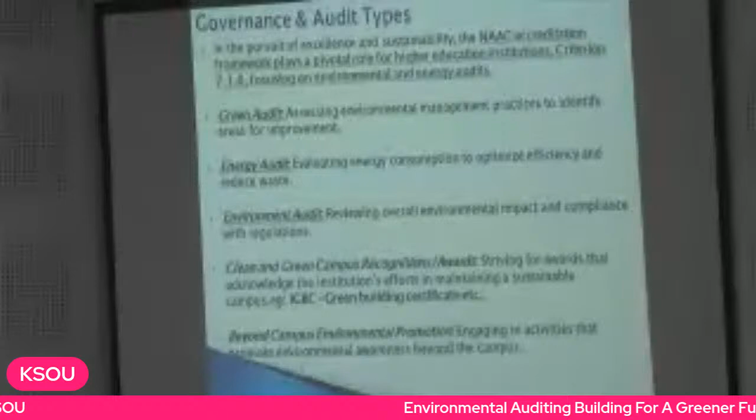There are various types of audits. One is green audit, which we discussed now. Another one is energy audit, just before this there was an energy audit. Energy is also one of the major areas because energy plays a vital role, because it cannot be seen, but it is having a vital role, and environmental overall performance.

And what will it give? It will give a reputation and recognition that we have discussed already. In the bottom line, I have mentioned green building certificate. Green building certificate is nothing but, if we take this auditorium itself, if you allow more ventilation to come in, more natural light to come in, and less...

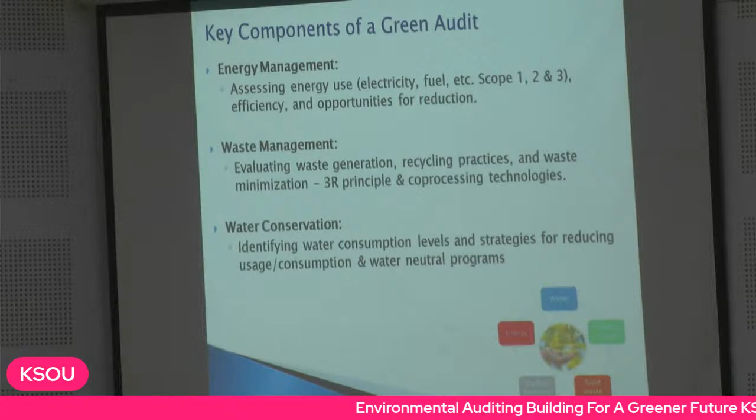Importing those technologies will help us to reduce the burden, for our commercial usage or for our industrial usage, to run a factory, or to run an institution, or to run a warehouse.

So how do we handle water conservation - the major thrust we have to give on the natural resources and also on reduction and conservation. Suppose if you are using more water, how can we save it, how it can be recycled and utilized for our gardening purpose, or land use purpose, or the landscaping purpose.

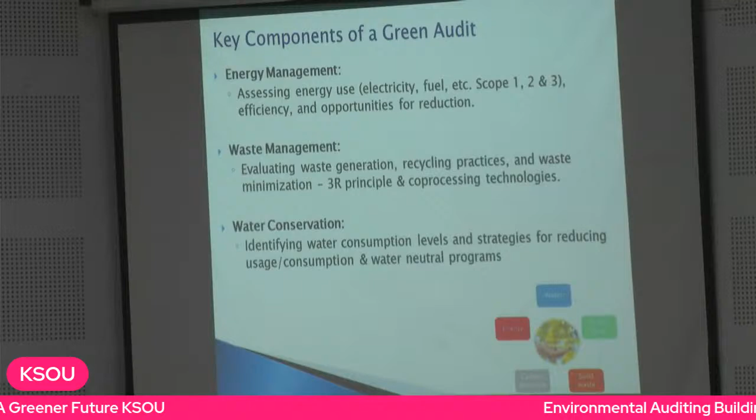These are also key components in terms of resource efficiency, meaning whatever we discussed - natural resources, how better we optimize our resources and how effective our controls are, how best we are utilizing. There are many terminologies coined now - water neutral, water negative, net zero, zero liquid discharge. Those all come under resource efficiency.

Carbon footprint assessment, basically greenhouse gas emissions - it is more of a tabulation, meaning like what I mentioned earlier, scope 1, scope 2, scope 3. For every natural resource or every energy we use, there is an amount of energy, there is an amount of impact to the environment in terms of CO2 generation.

So we have to tabulate it, and many technologies came into play, because suppose if you are getting power from wheeled sources, meaning from solar or wind, your conversion factor, or the leakages, or the generation - the amount of carbon dioxide getting burnt is less compared to conventional energies.

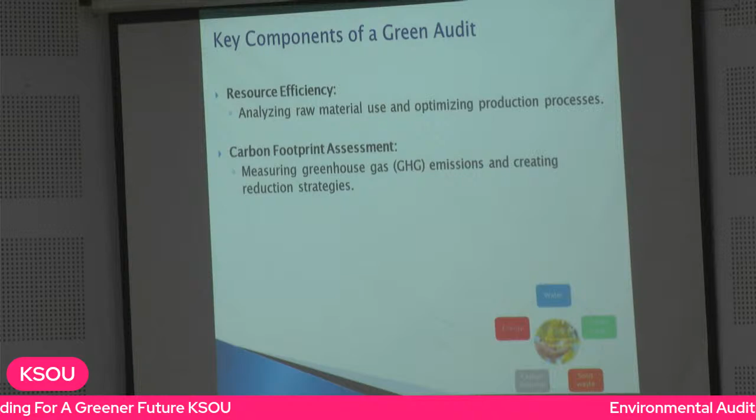Suppose we wanted to do an environment audit or assessment for this auditorium, this is the boundary. Within this boundary, we assess ourselves for data collection: how much electricity we are consuming per day, number of students, or number of hours, like that. And there should be inspection records and monitoring.

From this, we should analyze and evaluate ourselves. Is there any chance for improvement? Instead of using these lights the full day, can we allow natural ventilation or natural lighting, where we can reduce electricity consumption and reduce our requirement? And finally, report and submissions. Reporting means the current state, and recommendation is the future state, meaning you have an opportunity for improvement. And there will be follow-up. This methodology is followed in all ISO systems: plan, do, check, act.

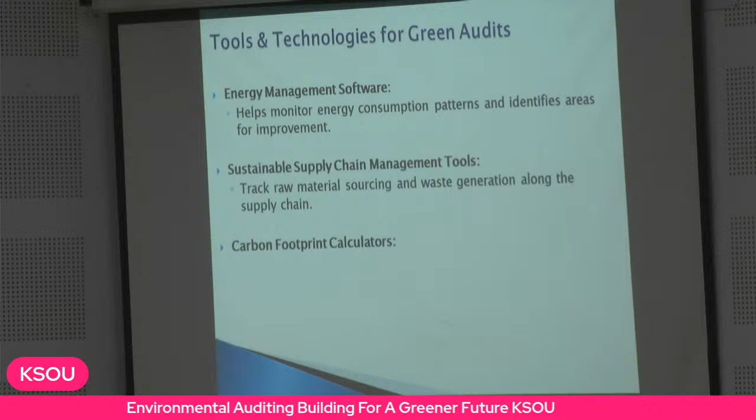Carbon footprint overall, that we have discussed already. This is one of the major areas, like in every audit or every assessment, why we will not easily go for it, because there are some challenges also.

One is cost. First one is cost, because you have to hire an auditor, you have to maintain your resources, you have to invest some part as cost for deploying these activities, manning the people, or involving external agencies, or taking approval for certifications. Sometimes you buy an instrument which is not as per your rated capacity, but you want to upgrade it to meet the standard. If not, you will not get certified. So those times there will be cost implications.

And data availability, if it is manual, there can be data mismanagement also, and that will lead to your benefits coming down. It may not impact much, but if it is a major regulatory one, your certification will get on hold, or you will be given negative remarks in the market, or sometimes your audit scores or assessment scores will come down.

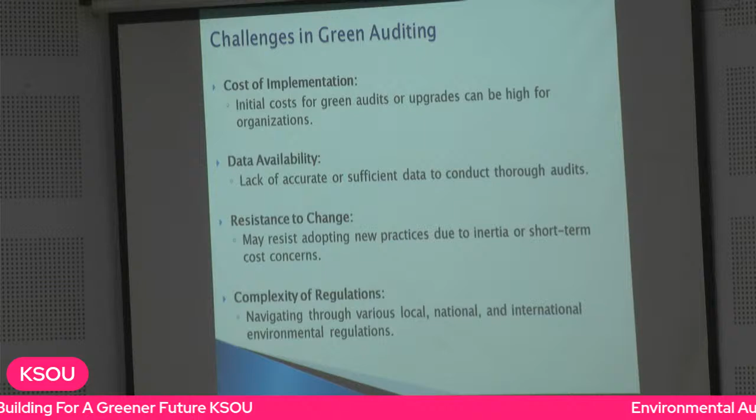And also sometimes there is complexity of regulations - understanding ISO 14001, the same clauses for my activities, I'll understand in my own way. But for the same clauses, for the same set of activities, an auditor understands differently, because they would have seen many best practices, many improvement areas. Whereas for me, my scope of understanding or expertise will be very low. Like this, there will be complications with respect to regulations also.

These are some of the reference standards, common for green audit or environmental audit. First is green building - the CII or Bureau of Energy have this code of rating system. And energy, as Bureau of Energy already mentioned, and ISO certification - as an industry we have all these certifications, be it quality management system for our product, ISO 14000 for environmental best practices, and occupational health and safety system for overall employee welfare and wellbeing, also considering industrial hygiene practices.

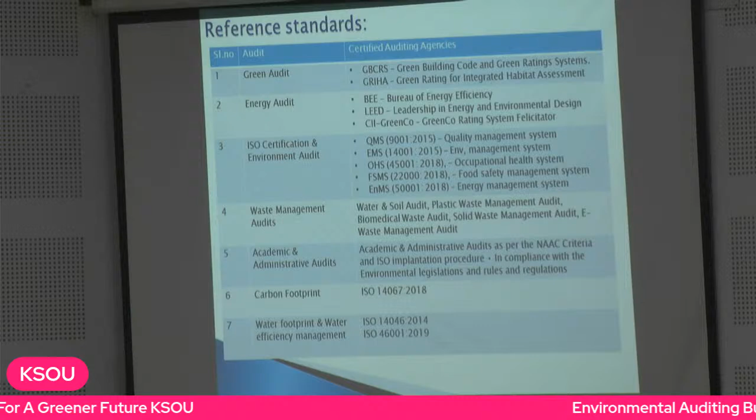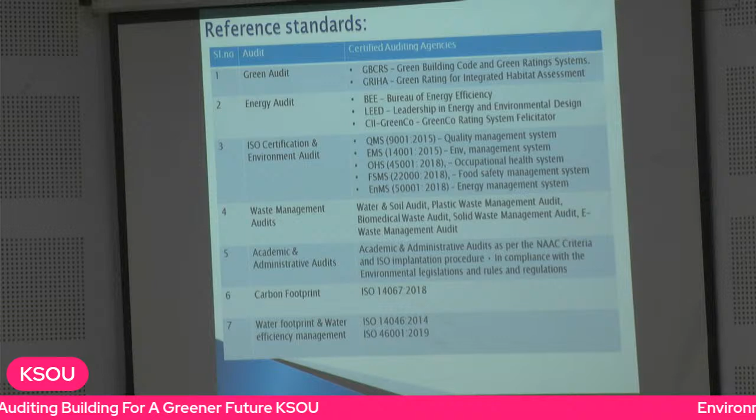And food safety management - we run a canteen round the clock for serving our employees, so that is food safety management. And EnMS, just before this session there was an EnMS, because whatever initiative we have made is certified under EnMS, Energy Management System. And waste - these are all different audits. And carbon footprint, there is a guideline 14067, which was revised in 2018. And water footprint and water efficiency under 14046 2014, and ISO 46001 under 2019.

Some case studies, it's a general overview - you can take a note.

Toyota - if Toyota decides all their units to be energy efficient, or all their manufacturing units' energy to be reduced by 10%, that is an objective. They will give a direction to all units. Then obviously they look for the opportunity - how to reduce, where, and they have an opportunity to reduce the energy. In terms, it is a benefit for them to manage the overall environmental impact in a positive note.

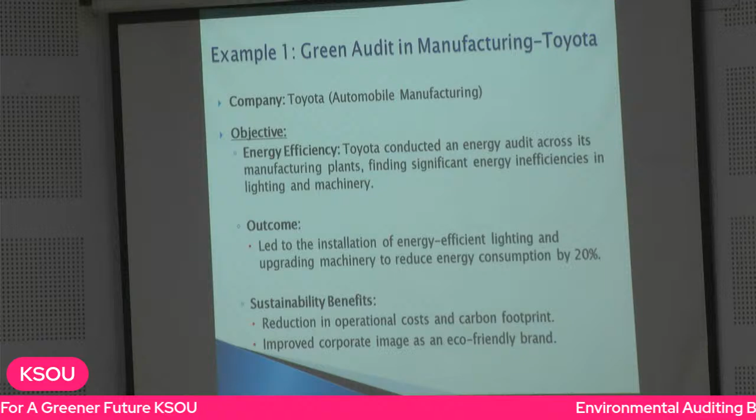This is Nestle chocolate manufacturing. If they decide to conserve their water consumption or water management system, they'll look for new technologies, advanced technology from the generation point till the water treatment plant - installing water flow meters, new technology type, leakage detections, and utilization of treated water for gardening or land use purpose.

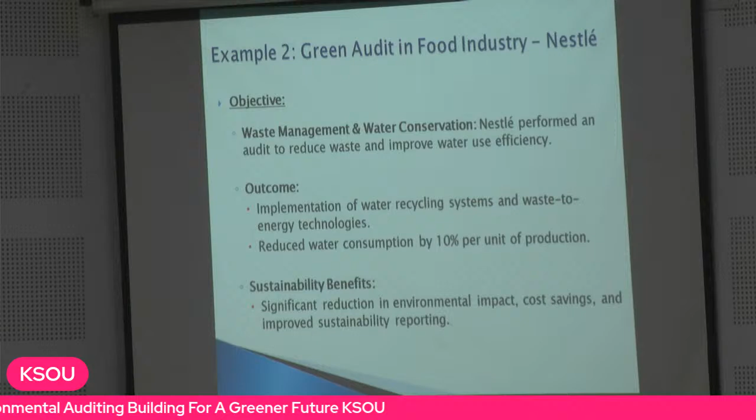This is related to Google, IT, basically carbon footprint, because Google is the service supporter for all the clouds. They are more into CPUs, technologies, transmissions, data transmissions, uploading. So whenever you send a mail, there is always carbon emission, energy loss. So if they take those things as an objective, they can achieve it.

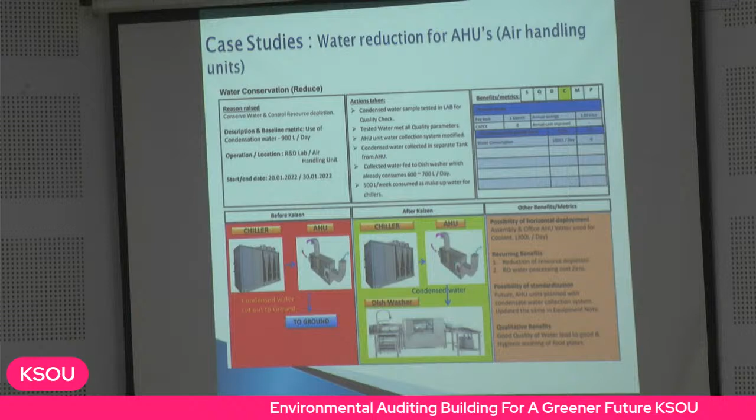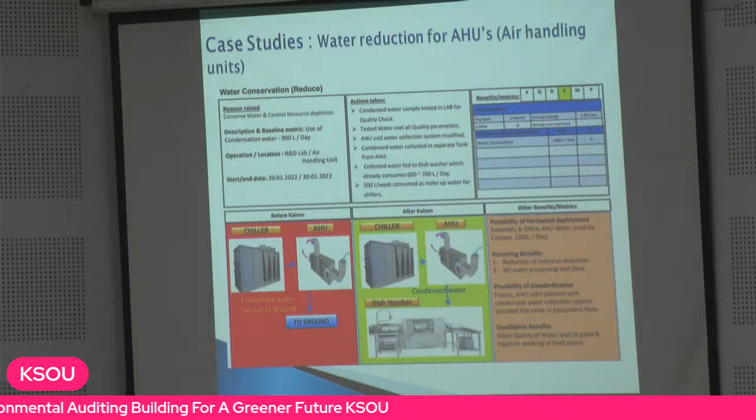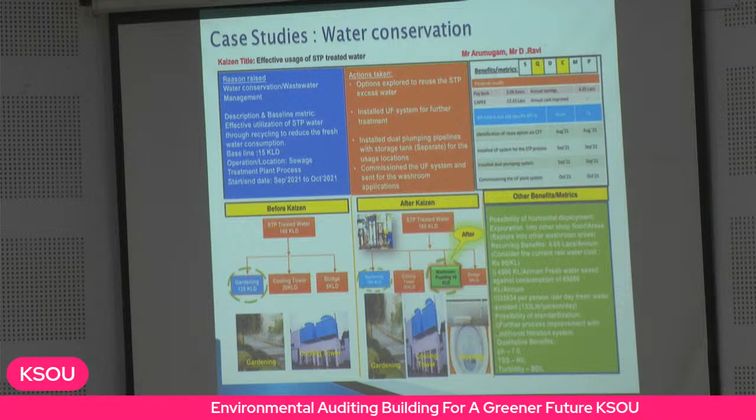This is the chiller. I'm referring to chillers also in terms of water utilization and conservation. I'll take our own industry example - three years before, we were using a water cooled chiller, which used around 30 kiloliters per month water consumption. Now we have completely eliminated it with air cooled - meaning I don't want to use any water. Complete elimination means instead of water cooled, we have moved to air cooled AHU system.

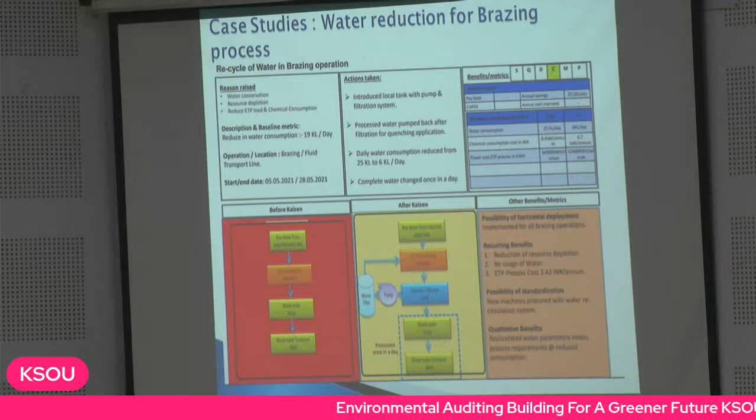This is related to the brazing process. Brazing also involves water, which is wasted. One industry pointed out wherever they have an opportunity to reduce, and by this, their daily consumption reduced from 25 kl to 6 kl.

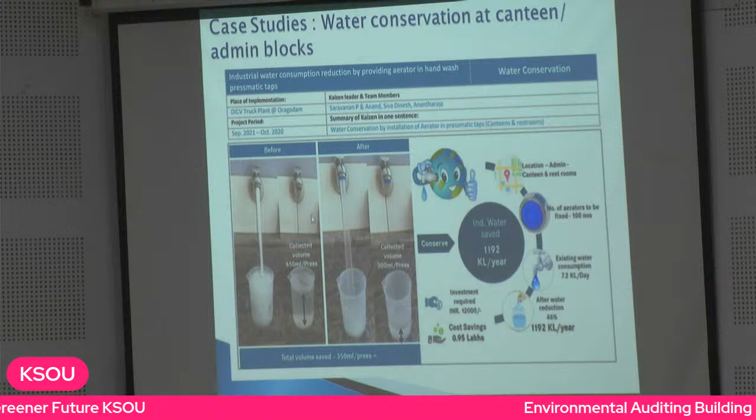This is quite common, you might have seen in every place or few places, aerator or eco nozzles. Wherever you fit eco nozzles, most of the industries, most of the commercial places, they will fix this aerator or eco nozzle only to conserve water instead of letting the amount of water be wasted. It will serve the purpose but also save the water.

This is a canteen dishwasher. Instead of manually cleaning, industry has adopted dishwashers. Dishwasher means less water consumption. With the water mist, they can clean the utensils or plates, which is much better quality and with hygiene also.

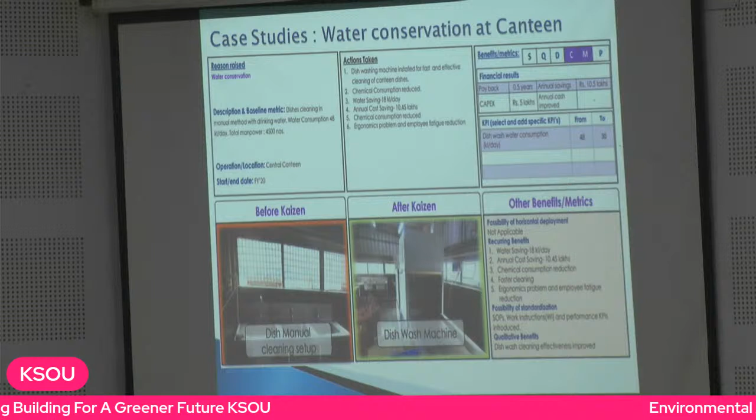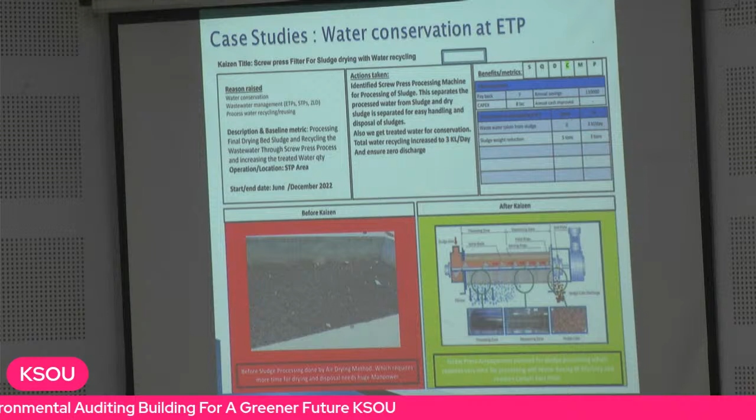This is also one of the water conservation at ETP. Instead of giving it to a drying bed, meaning allowing it to naturally dry, they have installed screw press, the dewatering pumps, that will dewater, and the wastage can be used as manure instead of wasting it out.

This is rainwater. Rainwater is most important because it is naturally available. As a nation, we are not matured enough because the average rainfall remains the same, it happens in the first quarter or fourth quarter. The rainfall is coming, but as an industry, as a nationwide, we are not maintaining it well. But these are some of the best practices; industries now manage rainwater for their purpose, for land use or gardening purpose.

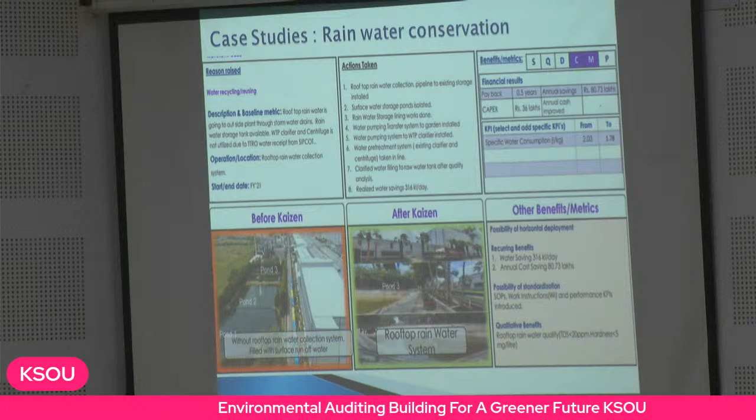It can be an open pond type, it can be runoff water. It can be stored in concreted, leak-proof concreted sumps, and can be treated and used for their urinals or restrooms.

This treated water they are using for their garden development. So basically STP or ETP treated water, after treatment, by ensuring the quality parameters, they are utilizing it for land usage.

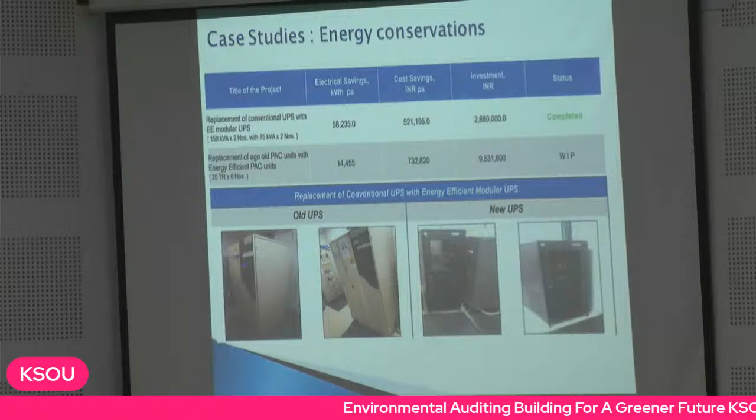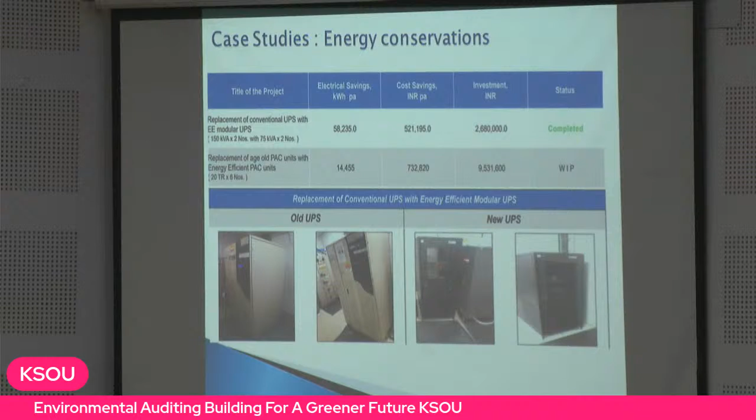This is related to energy conservation. Energy means UPS systems, so IT, wherever IT systems are there, they will use a lot of batteries for the ITs, though it is savings in terms of energy. And naturally available solar also, the roof systems, wherever you can install, even at home, at office buildings, even at industrial premises, you can get the maximum benefit for hot water and also for energy reduction.

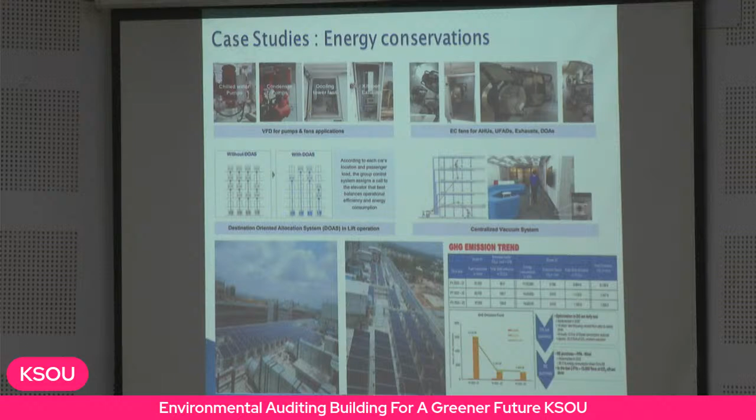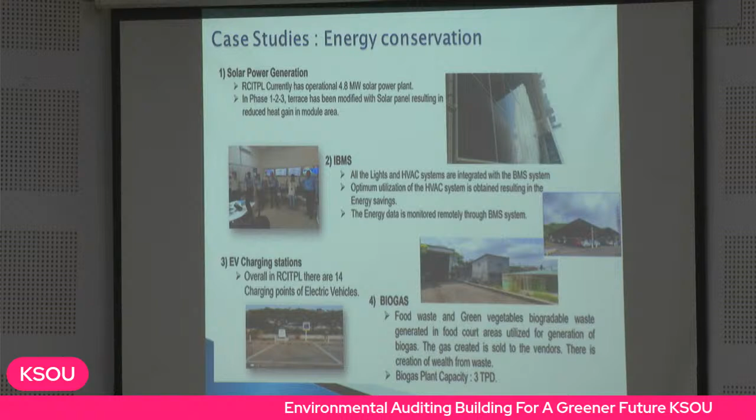This is similar to industry applications. One is solar panel, another is integrated BMS systems, and also biogas plant and EV charging systems. Nowadays EV vehicles are more, so charging points are required even for the campus, even for industries, even for commercial setups. By utilizing natural energy, the energy can be utilized or further modified for the beneficial.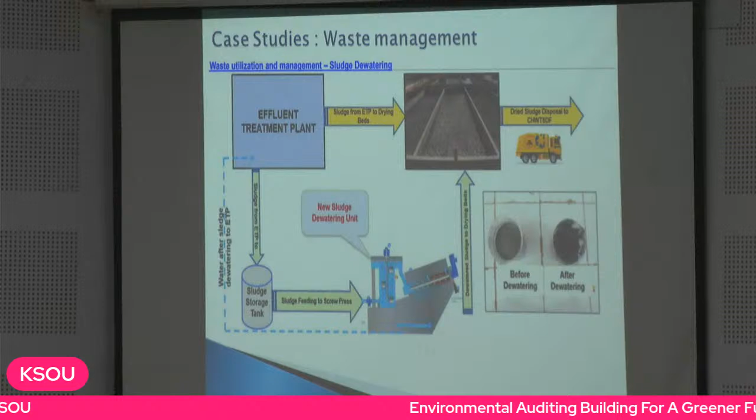This is related to waste management. The ETP waste after dewatering can be used for gardening instead of just dumping it as waste, or it can be municipal waste also, suppose if it is municipal activities.

In food waste management, this is the initiative of sorting out the food, basically degradable and non-degradable, and also allowing for a composter and getting compost and giving it for land use for local villages, also for the internal campus premises.

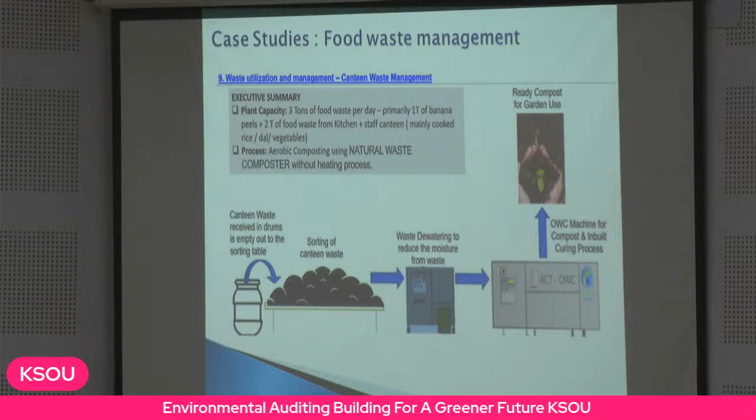So with this, I conclude my session. What we can recap on this environment audit or the green audit is basically whatever our interaction and relation with the environment, we have to do it in a sustainable manner.

We have to reduce our consumption records, and also the best practices should be adopted. It is not limited, even if industries are practicing it, it cannot be only for organizations or for institutions. So that's how the best practices should be cross-learned, adopted, and implemented.

And long-term benefit, obviously it is there, tangible and intangible benefits in terms of cost that will come over a period of time. But direct benefits, you will have better, sustainable practices, and also it will give a branding or image for the industry or for the institution as well.

As future leaders, wherever you might start your work or are already in the work, you should also emphasize these practices. Mutually cross-learn from each other, from industry to industry, or from organization to organization, or from different platforms. Seminars and workshops like these will help us build a better future.